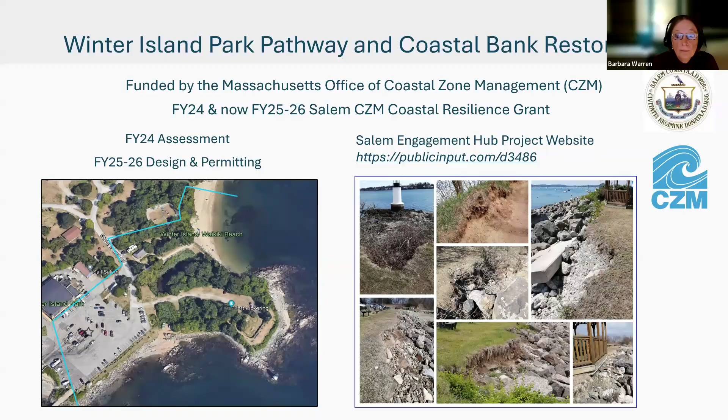Next slide. I'm going to be talking about the project overview, as he said. So I know the people who are on the call now, this is being recorded, so there may be somebody in the future who doesn't know what Winter Island Park is, but it is an amazing place that you should all visit. It has public beaches, open space, trails. You go there for cool breezes, or to sit in the winter and watch the beautiful ocean, a state-owned boat ramp, a state-financed pier, and an RV and tent campground.

And I think it's the only, certainly on the North Shore, the only public, municipally owned RV and tent campground that's on the coast. It has a community sailing program, and there's just so much more, as you all probably already know. So just the pictures say it. The pictures explain the beauty of Winter Island. Next.

And it has an incredible history. It was really important in this project that we protect the cultural resources and document them. PAL, the Public Archaeology Laboratory, has been our partner in this. Winter Island has this deep history that dates back to more than 6,000 years.

Archaeological evidence shows the area was used during the pre-contact Archaic and Woodland periods. We want to acknowledge this as indigenous land and acknowledge the Massachusett tribe who call this fishing place Naumkeag their home, and who continue to honor and hold this land into the present.

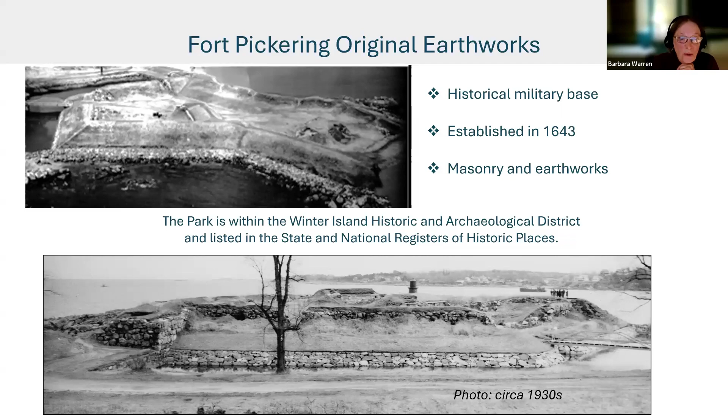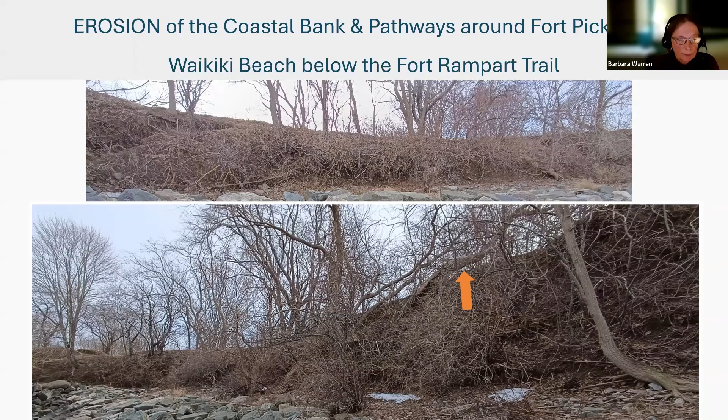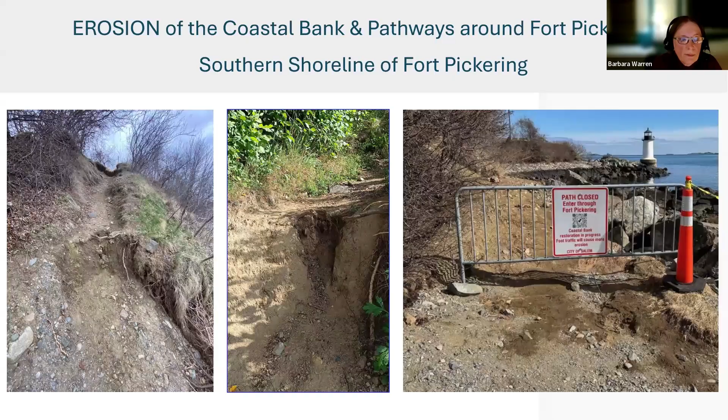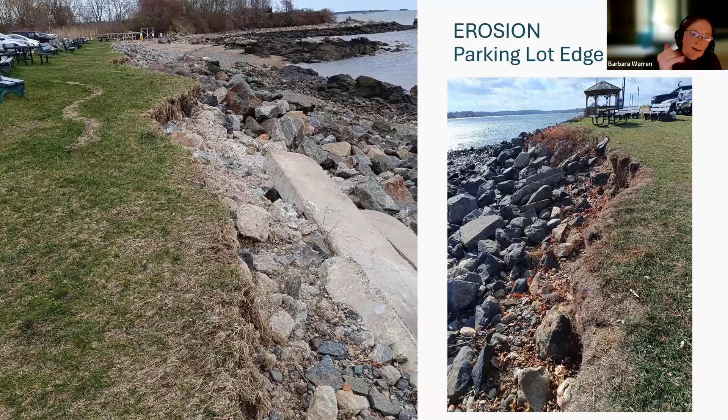And then we all know, who have been there, the erosion that has been persistent at the parking lot edge. Every time you go out there, you can see that the grass area is being undercut and it's getting more and more dangerous.

So the goal of the Winter Island project is to focus on the coastal vulnerability that is increasing due to sea level rise and the aging infrastructure. It looks as though those areas we're talking about may have been remediated some in 1976, but very little or anything has been done there since then. We're seeing the weather patterns changing, which is going to make these areas even more vulnerable. So our goal is to improve the shoreline resilience and stabilize the eroding banks at Waikiki Beach, the Headland, the parking lot edge, and the southern shoreline.

Using nature-based solutions rather than hardened coastal engineering structures. With this, we hope to protect the coastal banks, wave and storm damage prevention function, which is very important, and restore a more native seashore habitat that enhances wildlife habitat on the island and in Salem Sound, preserve the site's unique archaeological and historical significance, and maintain and improve public access.

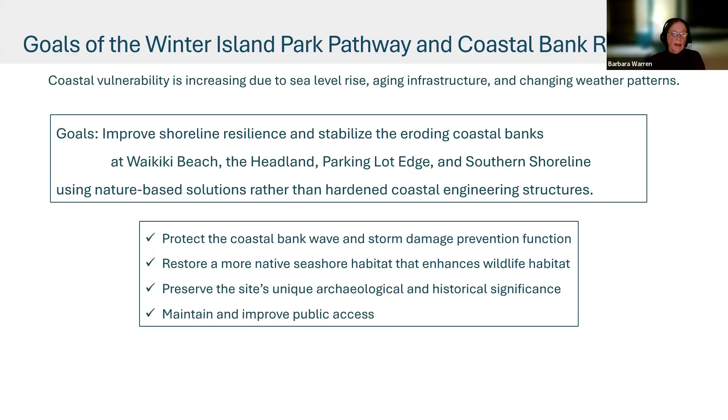Next slide. And now, permits. I was going to pass it over to Tabitha, but we wanted to let you know what we've been doing this past year. For the past year and a half, we've been working on obtaining the permits needed to stabilize the bank. First, we submitted an expanded environmental notification form and proposed environmental impact report to MEPA, the Massachusetts Environmental Policy Act. There were three things that triggered a MEPA review. It's not a permit, but it's a review.

That was the historical archaeological resources on the island, the project area being located within a designated geographic area around environmental justice populations, and lastly, it's proposing to alter coastal banks. We're very pleased to have received in September the certificate from the Secretary of Energy and Environmental Affairs with the final environmental impact report. So then we moved on to the Salem Conservation Commission to receive an order of conditions.

That's through the Mass DEP file number. And then, because the parking lot is in filled tidelands, Chapter 91 was also involved. This project received approval to move forward under a minor project modification, which has saved us a great deal of time. They acknowledged that this modification would work here because the bank stabilization improvements to a public parking area - all because all the proposed work is landward of the mean high water line, which is very important to remember.

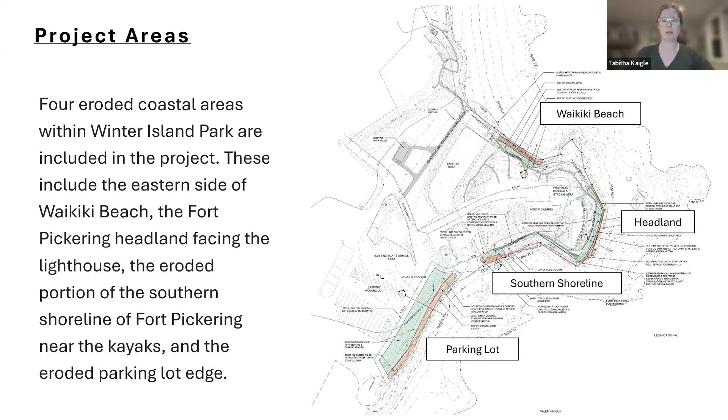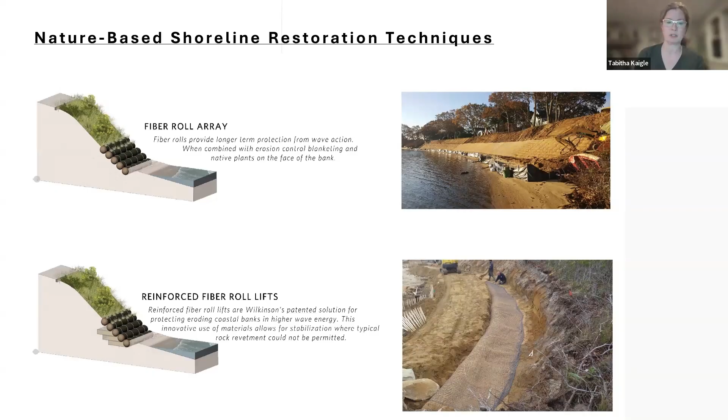This is another slide showing the sequence of construction, zoomed in on an actual project we have done work on. The first before photo shows on the left a really eroded coastal bank. This is a different situation than Winter Island Park, which is rocky—this is off of a sandy beach—but similar techniques can be used in both locations.

The middle photograph on top shows those fiber rolls as they're placed into the bank. The right-hand photo shows the sandy part on the lower left—that's the fiber rolls. They get covered in sand at the end to protect them from UV degradation. Above that sand is the erosion control blanket that stabilizes the bank above that fiber roll array, and that's what gets planted.

The bottom photo shows this completed project, several years after it was completed. You can see where that erosion control blanket is showing a completely vegetated site, full of really good native soil-retaining grasses and shrubs, with a really natural, beautiful look. This is essentially what we'd be aiming for with the project at Winter Island.

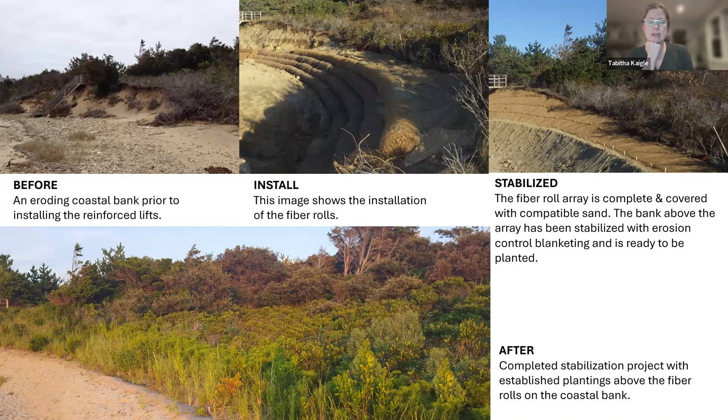Barbara did go over each of these project areas fairly thoroughly with photographs, but we can talk a bit more about each of these. This is an illustrative diagram showing the Waikiki Beach project area. If you were to walk down the pathway to Waikiki Beach and turn right, that coastal bank just above the revetment that's falling apart is where the project is located.

In that area, the orange section is where the fiber rolls would go, and the green section above is where the erosion control blanket would be placed after the invasive plants covering that bank are removed.

Barbara mentioned that in the right-hand photos there's bittersweet, shrub honeysuckle, and many invasive plants on that bank. One thing to highlight about these invasive plants, especially bittersweet: if you look at figure 2, you can see the eroded face of the bank. Even though it looks like there's vegetation, you can see the bare soils showing underneath the bittersweet. The real goal is to get those soils to a more stable angle and well vegetated, which is what will help retain that bank over the long term.

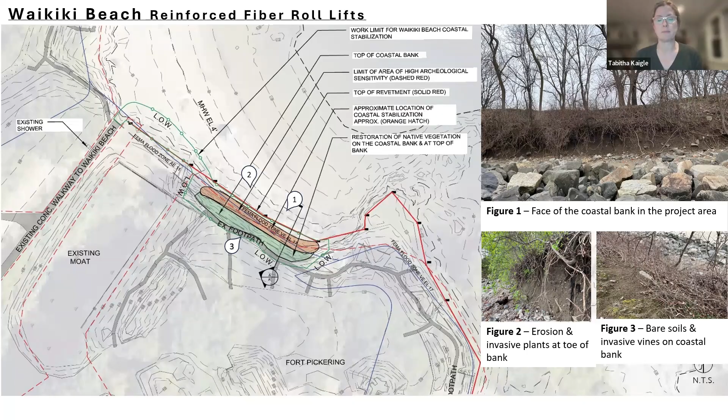This is a capture of the plan we've permitted through conservation. It doesn't have as much color coding, but it does have the planting plan, the fiber roll array, and the area for invasive plant management.

The goal throughout each of these project areas is to stabilize the bank and also improve and retain all the public amenities that people enjoy in this park. Some key points for the Waikiki Beach improvements include removing invasive plants and replanting a very comprehensive native plant community with good root systems that really hold in those soils.

One thing to mention, Barbara showed on one of her slides a really steep, eroded section of pathway where it cuts down back to the Waikiki walkway. That area is proposed to have some remediation and fill so it's not such a steep, deeply eroded slope.

To access the work location, since it's above the revetment but between that area and the bottom of the coastal bank, a sand ramp would have to be placed over those rocks for equipment to get there. That's shown by a striped hatch leading up to the fiber roll arrays, though it's hard to see on this slide. The sand will be placed to help equipment access the site.

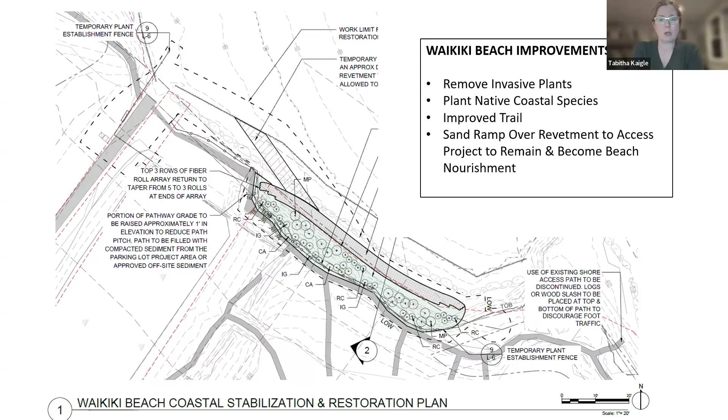Next slide, please. So the second project area is what we're calling the headland, which is the rampart of the fort that faces the Fort Pickering Lighthouse.

As Barbara mentioned, erosion in this area is happening from storm action at the bottom of the bank above the revetment, as well as, you can see in figure 2, these series of deep eroded channels where stormwater flow is directed during rain events.

In addition, if you walk there, you can see in figure 1 on the bottom left that there's a really old, degraded stairway that will be incorporated into the footprint of this project.

Again, if you can see that thin orange line on the plan, that's the area—about 300 feet of fiber rolls.

Fiber rolls were selected for this location because it's a bit higher in elevation and it's a very narrow area. We wouldn't be able to fit lifts in there without impacting the outline of the fort and potential archaeological artifacts, so we went with a solution that fits in that space and respects the confines of the fort to the extent possible.

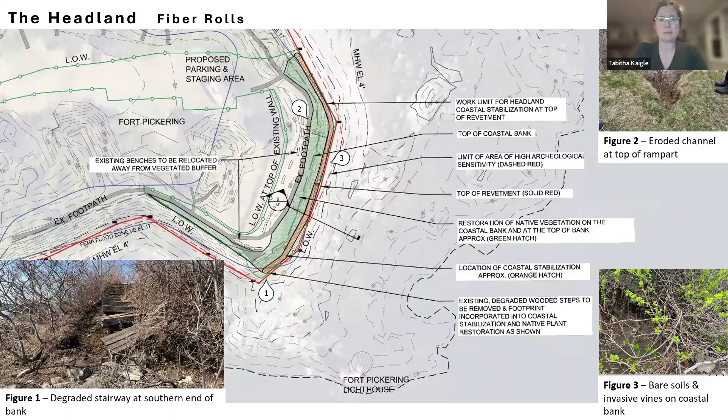Next slide, please. Again, this slide shows the permitted plan we worked with in conservation. It shows a planting plan, essentially the same things as the last slide, but a bit more fleshed out.

Key points about this project: the dilapidated stairway will be removed, and the footprint of that area gets incorporated into the fiber rolls and native plant restoration, becoming just part of the bank.

The existing benches may have to be pulled back and realigned a bit from their current location. They're proposed to all remain, just realigned.

Also, this project involves many invasive and non-native plants on that bank, which we're proposing to remove and replace with native species.

One other thing I should mention—and should have mentioned for Waikiki as well—these nature-based solutions take a couple of years for the plants to get established. For that period, we'd typically install a temporary plant establishment fence to keep foot traffic off those areas.

That won't affect the pathway, which will remain open—it's really just those areas where the native plants are placed that need a good establishment period without foot traffic. Next slide.

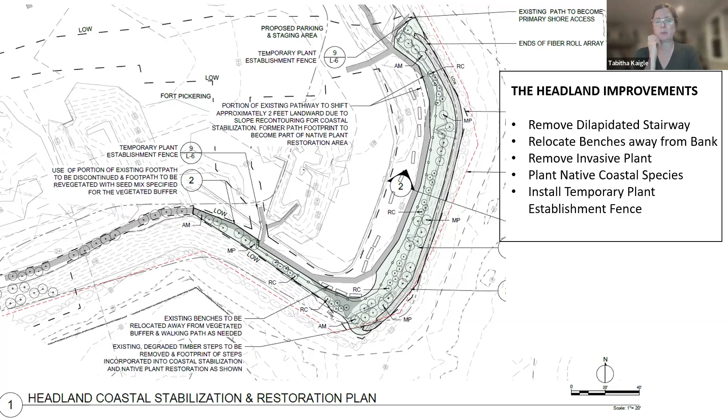Okay, and we're on to the southern shoreline. For this area, we're proposing reinforced fiber roll lifts, which provide more protection in areas directly impacted by storm surge—and this area has clearly been impacted directly, as discussed earlier.

That eroded lower area in figure 1 is the pathway that's now closed off. In addition, if you walk around the corner from the eroded pathway, figure 2 to the right shows a section of coastal bank that is also slumped—basically broken off and slid down.

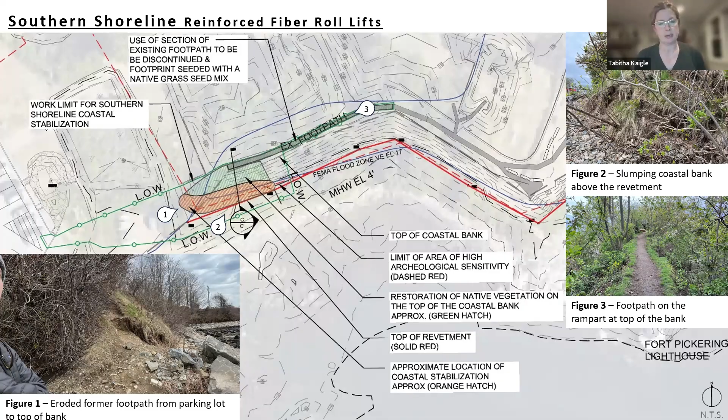For this area, the orange hatch shows the relative footprint of the fiber roll lifts, and the green area above shows where erosion control blanket and native plants will go. Next slide, please.

This is a snapshot of the conservation plan that was recently permitted. Key points for this shoreline improvement area, as discussed, include removing invasive plants and replanting with native plants.

One thing specific to call out in this project area is that at the top of the coastal bank, where the eroded footpath originally connected, we're proposing to plant that obsolete trail with additional native shrubs and grasses.

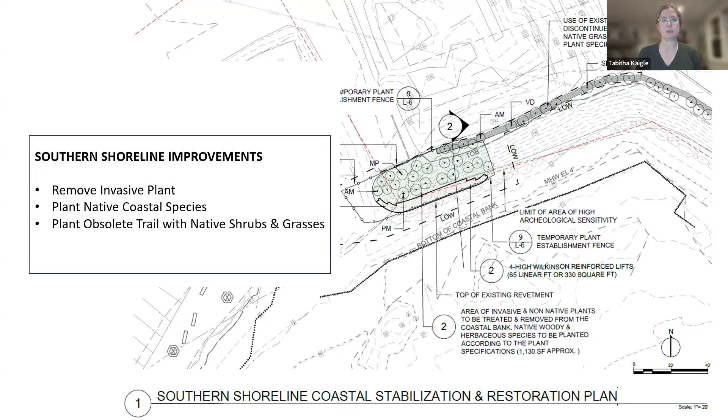It's not a trail that goes anywhere anymore, but there's still complete access around the headland. It's just that one section of trail will be replanted.

And finally, we get to the parking lot. For this area, we are proposing reinforced fiber roll lifts. Again, this is an area that is in a velocity flood zone. It gets hit by storm surge. It's very open and exposed, and it's approximately 300 feet of coastal stabilization, which you can see in the orange hatch.

So this project is a little bit different in that there really aren't invasive plants here. The project area above the fiber rolls—maybe we can switch over to the next slide, please—I can describe that a little bit more.

So we have that eroded edge of the coastal bank, and then we have that grassed area where there's the gazebo, where there's seating, and what's being proposed here is all of that is getting incorporated into this project, and all of those things will be retained on this site.

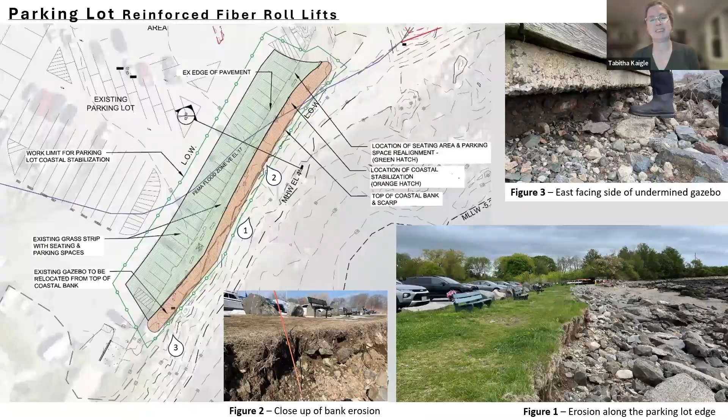Thank you. So the gazebo will be moved approximately 50 feet, but remain in the same orientation and facing that it is now, up to a slightly higher location, which should protect it for the longer term.

And if you look on the diagram on the left, there's a little star, and that star is where the gazebo currently is—you can see it says timber gazebo on helical pilings. It's moved about 50 feet to the north. So that's one thing that's happening in that area above the fiber roll reinforced lifts.

Some of the other things that are happening: the benches and picnic tables will remain and be realigned. In addition, there will be more accessible benches and an additional accessible picnic table proposed. And there will be accessible parking both near the proposed location of the gazebo and towards the rain garden.

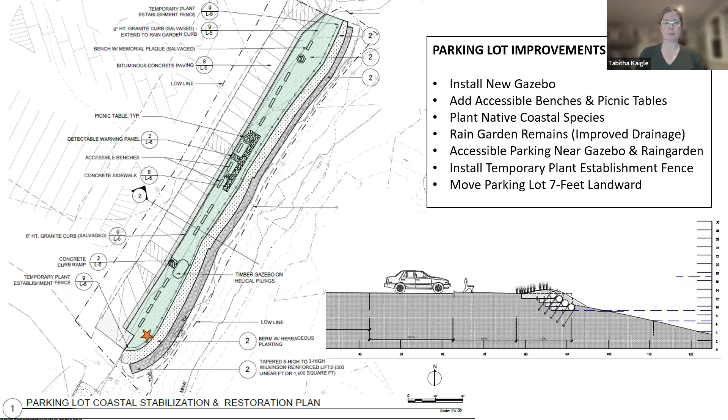Next slide, please. I'll just mention that the plan is for the gazebo to be a new gazebo of similar size and design at the new location, not the existing one moving to that site. Good point. Yes, it will be a new gazebo that is similar in dimension and size to the existing one.

So that was a quick overview of the 4 project areas, and I wanted to dive back into the coastal stabilization materials a little more closely, just so we can revisit those now that we've talked about what's being proposed for each area. This slide is more of a close-up of the type of materials used for these systems.

The top photo on the right-hand side is the biodegradable jute and coir erosion control blanketing being installed. The middle photograph shows the fiber rolls, and the bottom photograph shows the cabling used to wrap around those fiber rolls and tighten into the ground to hold them in place. Next slide.

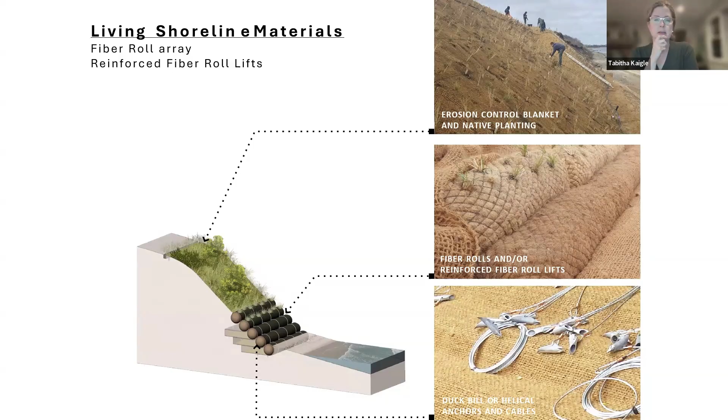I just wanted to add, to give the public a visualization: those fiber rolls are 20-inch diameter, so almost 2 feet in diameter, and they're incredibly dense. We use those so that they last a long time before they biodegrade, fill up with soil, and biodegrade.

That's a good point as well, Duke. So those fiber rolls are organic materials which do eventually break down and biodegrade. But the long-term goal is that once those break down, it's the plants that take over that stabilization of the coastal bank.

That's the ultimate goal of these projects. The fiber rolls get installed initially and provide stabilization for the bank. The sand that goes over those fiber rolls provides nourishment to the nearby coastal resources and the beach. But over the long term, as those fiber rolls biodegrade, it's these deep root systems of the plants that will hold that soil particulate together and slow down the rate of erosion. That's why the temporary plant establishment fence, to give those plants the best start possible, is really important in projects like these.

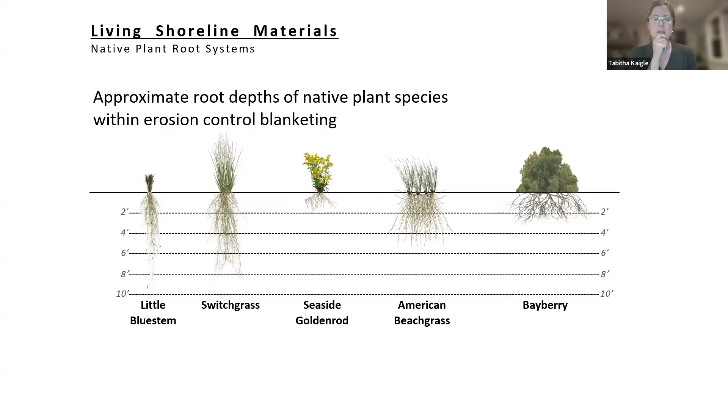Next slide, please. So this is a plant palette of some of the plants being proposed in the various project areas. I don't think we need to get too deeply into these, but these are all great native plants. They're adapted to coastal conditions, and they look beautiful too.

I think that's another benefit of this project. Some of those invasive plants are just really unattractive, and they don't provide good soil coverage. They don't have the habitat benefits for birds and wildlife that the plants shown in this photograph will provide in the long term.

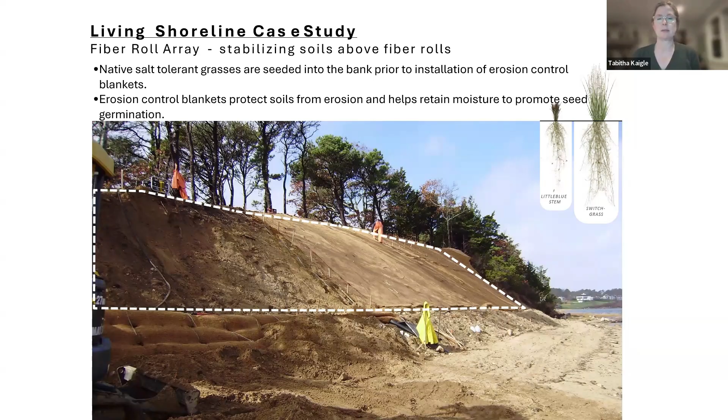Next slide, please. This photo shows what it looks like right after that blanket is installed and planted. You can see all the plants that have been put into that erosion control blanket. In addition, there's seed and other herbaceous plants underneath that blanket that will sprout up. The fiber rolls are completely buried in the sand at the bottom of the photograph.

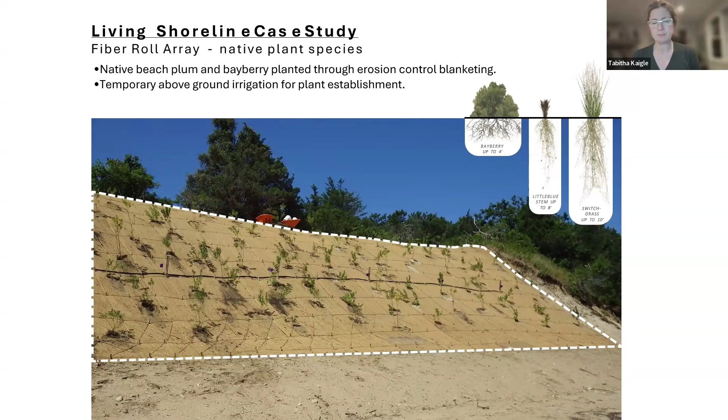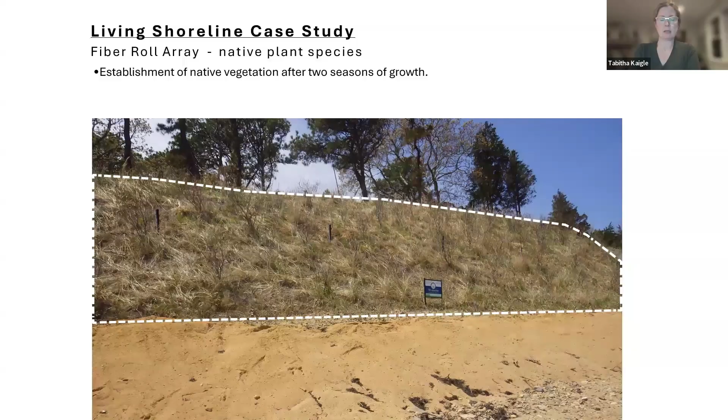I believe this was our last slide. So unless anybody has any questions, or Duke wants to step in with anything, we can move on to the next part of the presentation.

Thanks, Tabitha. If people have questions, they can ask them in the Q&A. That was a great overview. It's really exciting to see all of the projects you've done and all of the established native plants in those different areas. It's really exciting to think about Winter Island transforming in that way. Thanks again for sharing that.

We are furiously working on a grant application right now that is due on Friday, which we are applying to the Massachusetts Coastal Zone Management program, as well as the Municipal Vulnerability Preparedness Grant Program. The state agency that both of those fall under is the Executive Office of Energy and Environmental Affairs. They have a new grant system where you can apply for multiple grants at the same time. The CZM grant is likely the most probable one, but it's ultimately up to the grant reviewers to decide what the funding source will be. We are applying for all of the work just described in that grant.

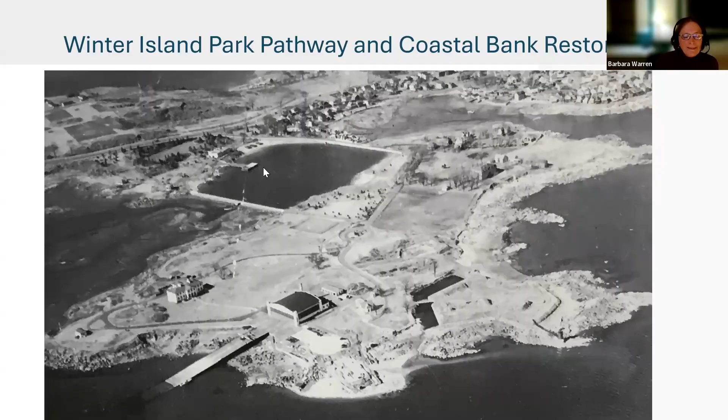I think I can't remember if we mentioned it when we were talking about permitting, but another aspect of the construction project is that PAL will be monitoring the excavation work to ensure that if we do come across anything of historical or archaeological significance, we're treating that appropriately, and just paying attention to that when we're working in those sensitive areas.

Well, I hope you will share what's happening with what we've been doing at Winter Island, and what we hope to do, and share the project with your neighbors or your friends or the people you meet out at Winter Island. We would greatly appreciate that, and we hope that some of you will join us at the community engagement events, either the historic walk or the bittersweet walk. And like I said, there will be more opportunities.